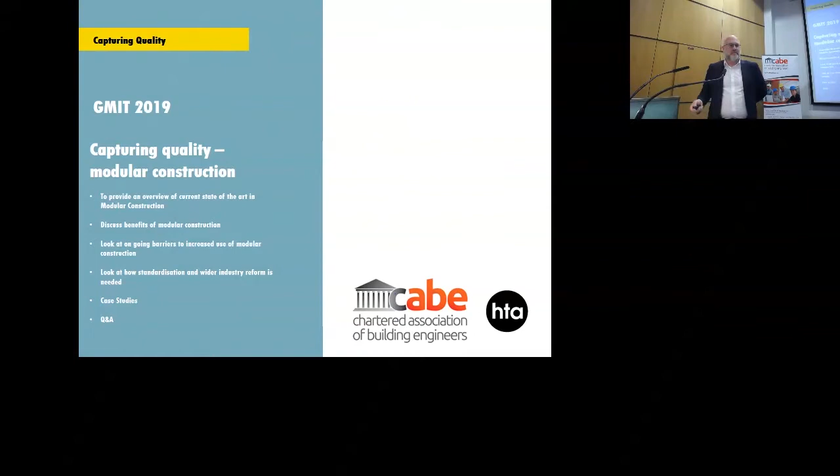As has been said, I spent 10 years in the UK government working in the Department for Communities and Local Government, now the Ministry of Housing, with lots of interrelationships with housing policy, but mainly building regulations. During that time, the reason I became interested in modular was that our government adopted a policy called the Accelerated Construction Programme - a programme to try and deliver around 10 or 15,000 additional homes at a very fast rate, which focused heavily on modular construction.

One of the lessons that we all need to learn, and policymakers need to learn, is that when you force construction sectors to adopt technology with which they're not familiar very quickly, or throw money into construction sectors to push for particular outcomes over short spaces of time, that massively increases risk, because you're forcing people to use technologies and processes they need to understand well to deliver well. So I got very interested in how we manage the risks around the growth and use of modular construction in a way that delivers a really good, safe product at the other end.

HTA Design LLP, who produced a lot of the content for this talk, are an architect's practice rapidly becoming recognised as a world leader in modular design. They've done some of the tallest buildings in Europe. This is Apex House, the tallest modular self-supporting building in Europe. And I'll show you a project later, which is the tallest self-supporting modular building in the world.

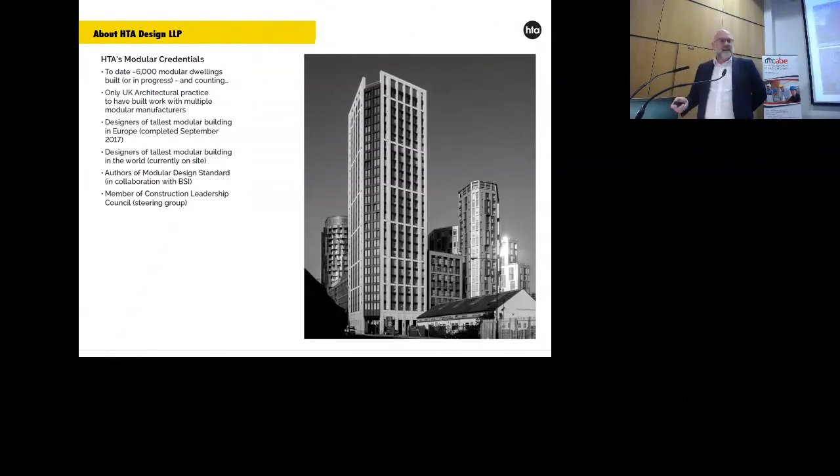They've done a lot of great thinking, but there are still questions that remain unanswered about how we actually utilize and really capture this new technology. Many people in the room will say, well, we've been here before. We've talked about modular time and time again. Every 15 years, there's a new initiative that says this is the way forward. So the question we've been trying to assess, working with BSI, the British Standards Institute, is developing a PAS standard that can help address this. The question we're asking is, what are the barriers that we need to break down to ensure that can actually happen?

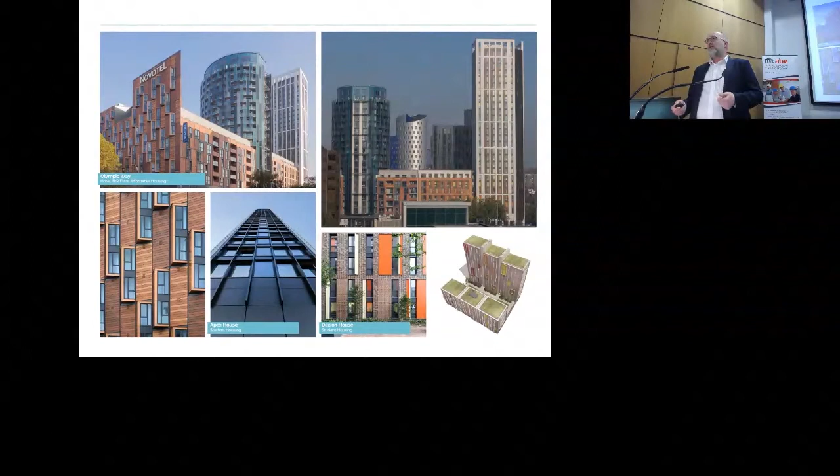So this is just a couple more slides of the Apex House project. It's not just about tall buildings. Modular in particular is well suited to any building projects where you've got a lot of repetition. The Apex House project is, I think, 560 student accommodation units. It's not just the tower block, it's the two-side, red terracotta clad lower rise units. So as long as you've got the repetition and scale on site, it's an absolutely brilliant way to deliver volume very quickly, primarily beneficial into sectors where you want fast turnover, so private rented or social rented sectors where you want to get things onto site and get the rental or occupation up very quickly.

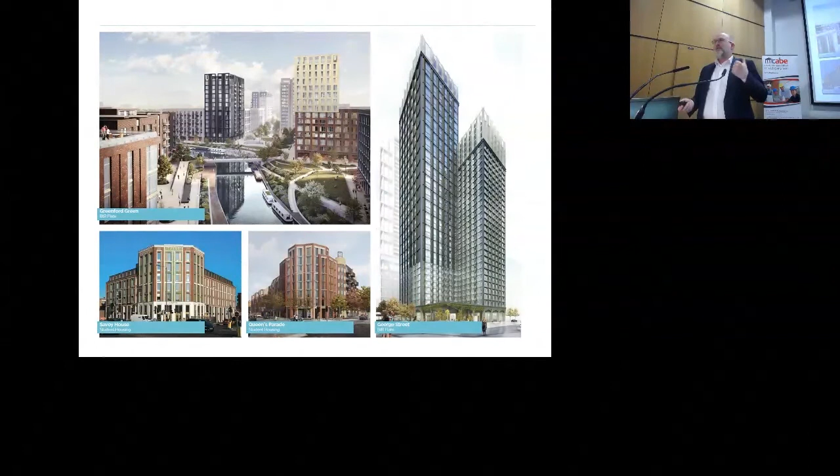And these are some other projects, very variable, doesn't have to be non-traditionally clad. The projects at the bottom of the page have got an external brick-faced facade in a style that was required because of the conservation area they're being built in. The project on the right is currently on site - it's the world's tallest residential modular building, 38 and 44 stories of self-supporting units around a slip-form concrete core. I've got a photo of that on site at the moment. If anyone wants to see it at the end, they are literally building these slip-form cores standing entirely independently at the moment. They're incredibly high, slender structures, and it's quite fascinating to watch them come together.

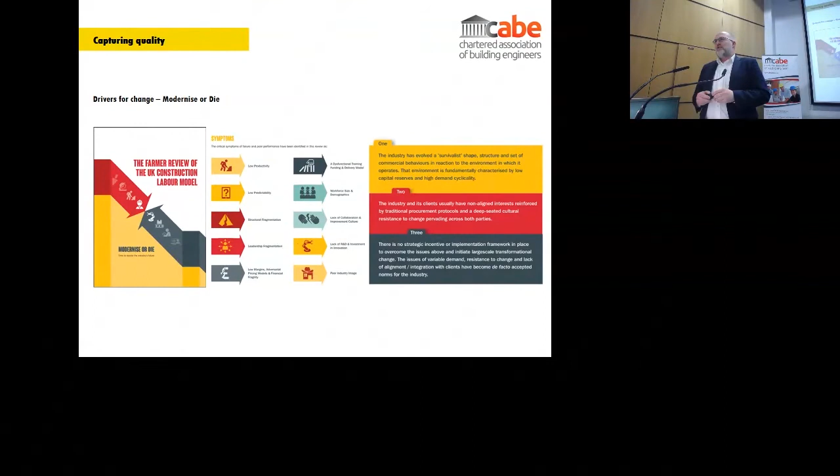So what's the context for these questions? I'm not going to go into these in too much detail, but you've heard it all before. The problems we have in our sector are really pretty well understood. We really do understand what's wrong - it's the solutions that are difficult. But the Modernise or Die report by Mark Farmer, which came out a year or so ago, set out a whole range of problems that are understood: low productivity, low predictability, structural fragmentation, leadership fragmentation, low margins, adversarial relationships and pricing models, dysfunctional training, workforce size and demographics, and lack of collaboration.

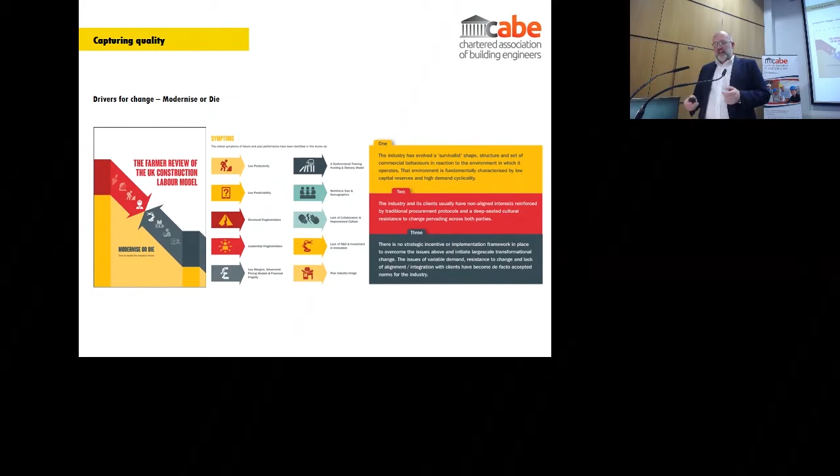And it came up with three key recommendations that are relevant. First is to basically drive towards changing commissioning from traditional to pre-manufactured approaches. Second is to invest heavily in innovation, so a real drive towards adopting those technologies. And the third was to shift housing policy to, again, drive the need for housing towards the adoption of pre-manufactured technologies in their use.

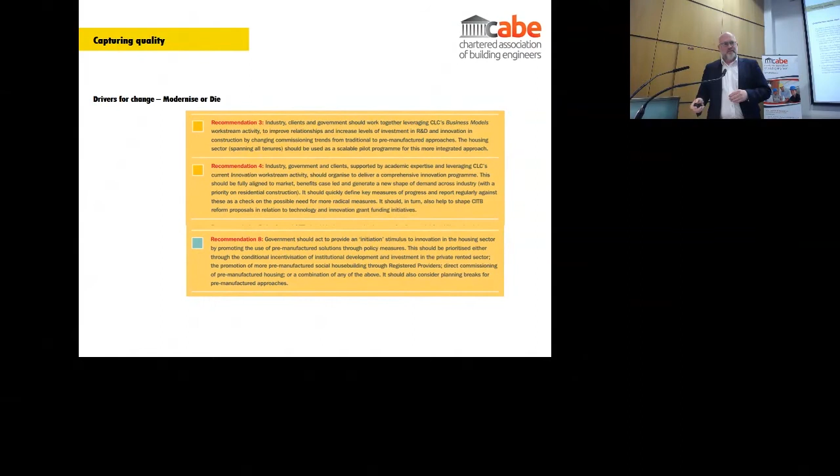The UK has also got an industrial strategy that came out last year, setting out really ambitious targets for construction in the UK. The aim is to achieve a 33% reduction in cost, 50% reduction in time for construction, 50% reduction in greenhouse gas emissions, and a 50% reduction in the trade gap around construction. I'm not sure how that's going to work out given everything else that's going on, but we'll have to see. It had three strategic aims that underpin the whole of that agenda: optimising the use of digital technology, increasing the use of off-site construction, and moving to an approach that appreciates and prioritises assessment methods using whole-life assessment procedures.

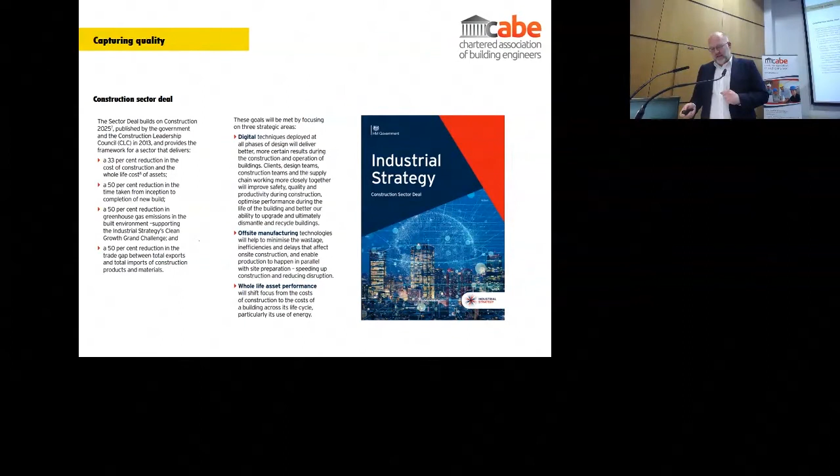Now, clearly the central one of those, moving to off-site construction, is very relevant to modular - clear sense that's part of the solution, part of the way those targets are going to be achieved. But off-site and modular is also very good in terms of helping optimise the benefits of digital frameworks and BIM in particular, but also very good at improving the predictability of asset performance and durability and things like energy performance. So we also have a major housing problem in the UK. We have a massive shortage of housing. The government's now targeting 300,000 homes a year to be built.

The capacity and supply issues that we have, you know, our traditional sector is pretty much maxed out. This table exemplifies the difference between supply and demand, between private and social housing. There's a big gap there to be filled, and it's primarily in the social housing sector.

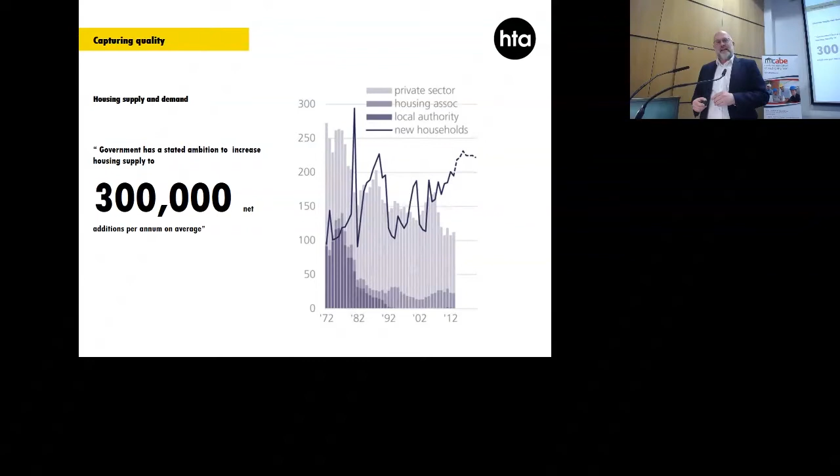The private sector is not going to respond enough to meet this overall housing need. And if you're looking at rental sector, private rental or social rental, modular is really relevant. And then we've talked about Hackitt. The Hackitt review will have implications that are going to continue to see change in our sector in the UK, probably major changes over the next decade, and changes that will be ongoing for the next 30 years, I imagine.

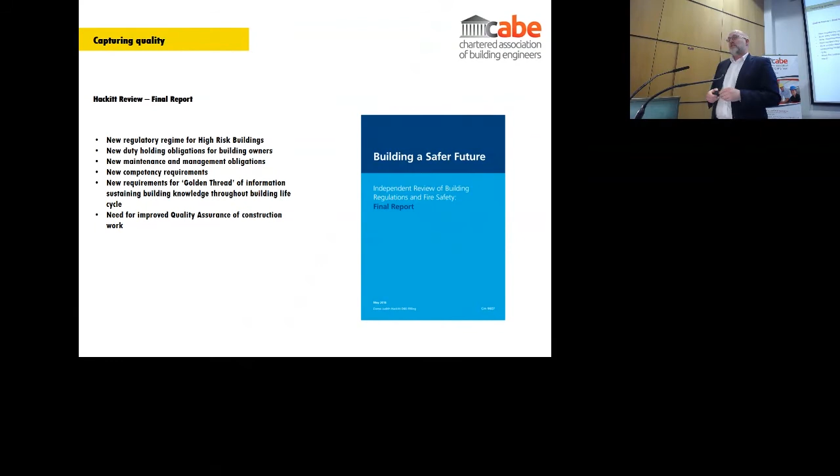It's absolutely fundamental that we sort out problems so that we don't see events like Grenfell Tower happening again. And quality is right at the bottom of that picture. We have, as Dame Judith has mentioned and others have pointed out, an industry predicated too much on bottom price and not on certainty of delivery of quality. And all of these considerations are relevant.

So I thought it'd be good, refreshing before lunch. Last session before lunch needs some pictures of buildings to keep people awake, I think. So I just thought I'd kind of show a few of these.

So this is the Apex House project I mentioned earlier. Completed 6 months from start to finish, probably somewhere around 45. I don't know the actual contract value, I think it's around 45, 50 million. Just under 600 student accommodation units.

The actual construction, as you can see, the slip cores formed at one end, and 6 months later the project's entirely complete. There were never more than 12 site operatives on site. That's the most there were in terms of builders on site at any one time during this project. The change in dynamic between traditional construction and modular in that respect is just absolutely astonishing.

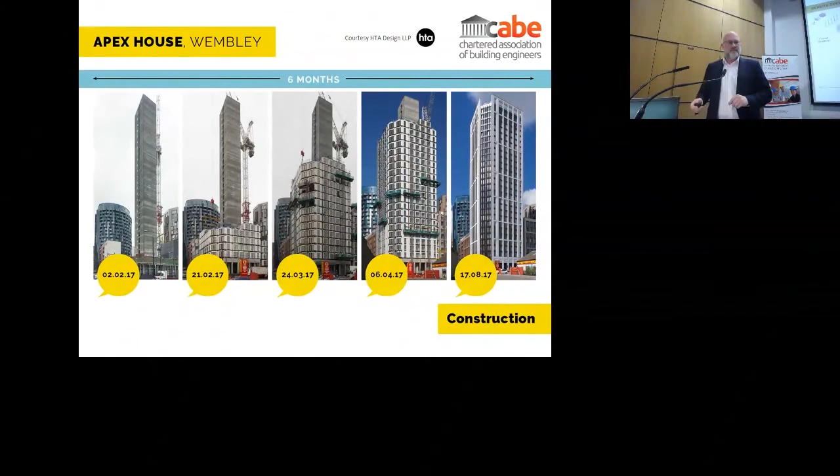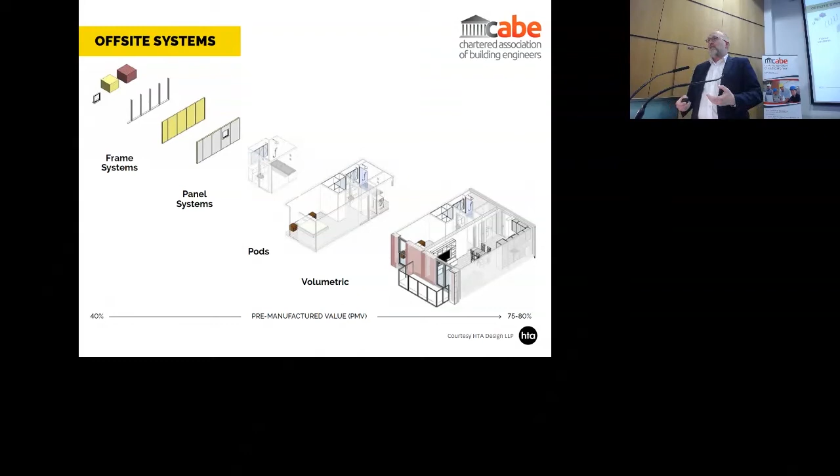There are, of course, other types of modular and off-site construction. Other flavours are available: components, frame systems, panel systems, pods and volumetric. The work that I've been doing is focused largely on volumetric and modular, because as you go across this scale from elemental off-site manufactured to fully modular, you start to capture more and more of the benefits from the off-site manufacturing process. And those benefits are really serious.

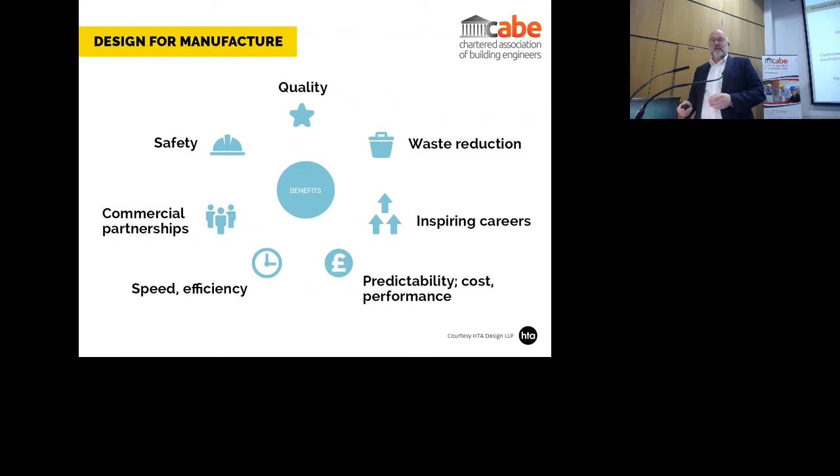There are great quality gains, there's waste reduction, there's a real shift in the opportunities you can offer people. At the manufacturing base, you've got a much more stable lifestyle that's geographically located in better working conditions, so it's good for staff retention and recruitment. You've got predictability in terms of cost and performance, speed and efficiency. Commercial partnerships are more sustainable because a lot of the adversarial elements are removed. It's an entirely different way of operating, and much better safety, with fewer operatives on site.

How big are those gains? Why are they so significant? Well, these are assessments from projects. They're not kind of national statistics, but they're pretty important. So reduction in speed of delivery up to 50%, so anywhere between 20 and 60% assessed from real projects.

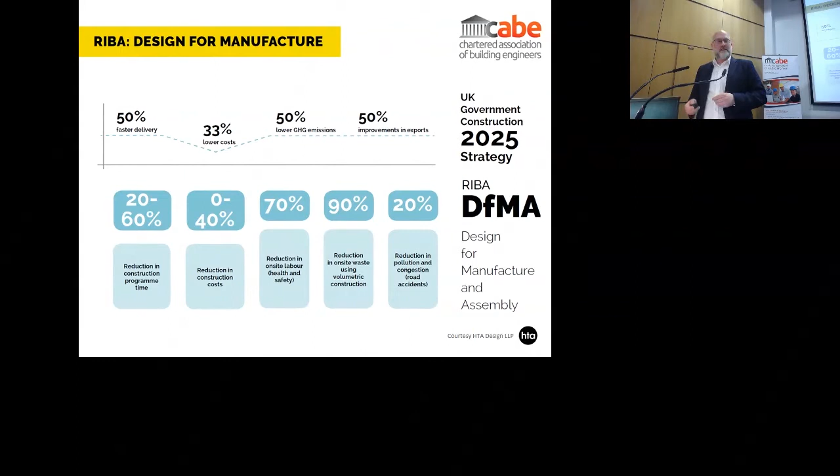33% lower costs on average, 50% lower greenhouse gas emissions, 50% improvements in exports, and up to 90% reduction in waste. These processes are incredibly efficient because materials are cut exactly to size and exactly to specification, and you can really drive waste reduction. So overall, you've got quicker construction, earlier rent returns, less disruption. You've got more sustainable buildings, greater confidence that design is deliverable.

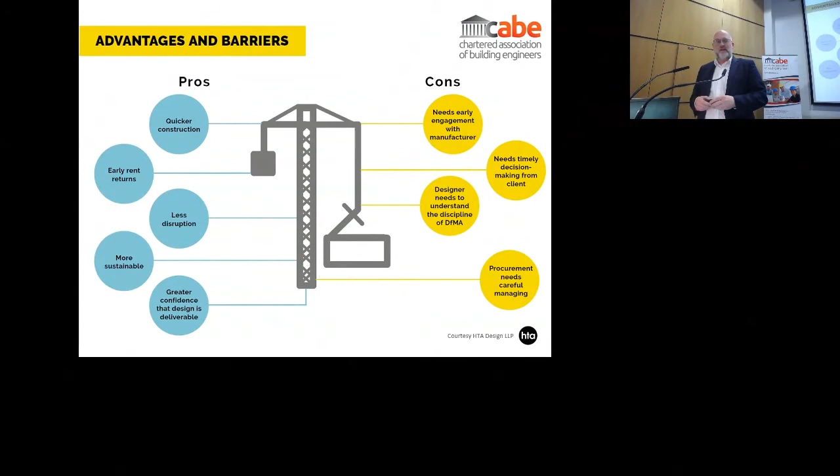But there are things you need to do differently. You need to engage earlier with manufacturers. You need timely decision-making from client that's in a different structure to others. Designers need to understand the discipline of designing for manufacture, designing these buildings. It's a different process, and procurement's different, so you need to think differently about that.

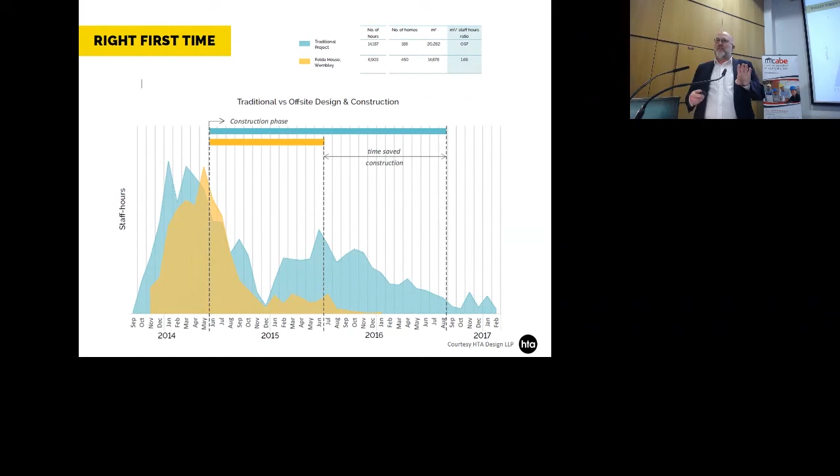All of those issues, that's the difference that's there. And the architects I speak to who work on these projects, they love doing the modular, not because it makes them more money, but because their quality of life as architects working on those projects is so much better. It's such a different experience compared to traditional, because they have a high degree of certainty that what they've designed is going to be built. The entire focus of the project team is on delivering what's been designed, and the fragmented and poor business models that are problematic for many traditional projects just aren't there.

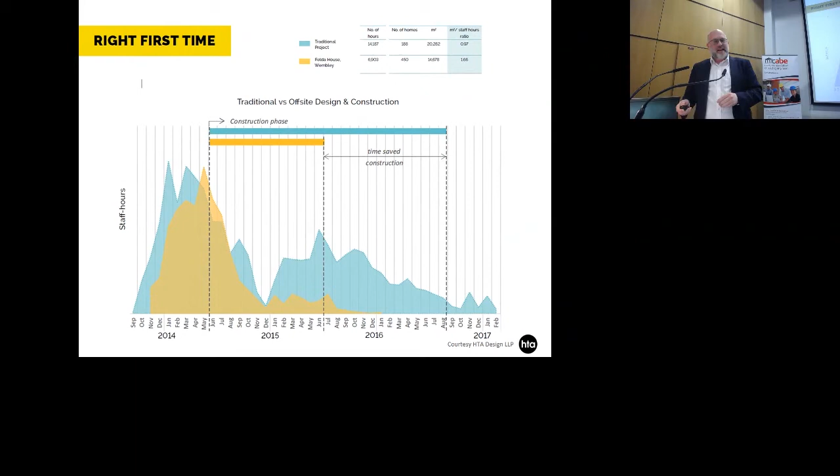So they're all won over. They're totally won over. It's a totally different life experience for them, and I think we shouldn't ignore those wins for people's quality of life.

There's also a really big economic incentive if you can turn over your development more quickly, because there's a big speed gain in this—remember, anywhere between 3 to 6 months on substantive projects. You can actually do more projects within any given time frame, which means you're going to maximise and deliver much better financial performance to your investors.

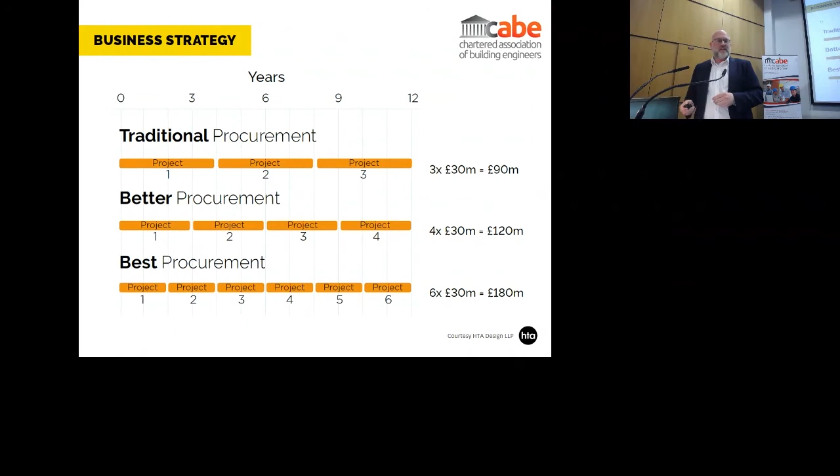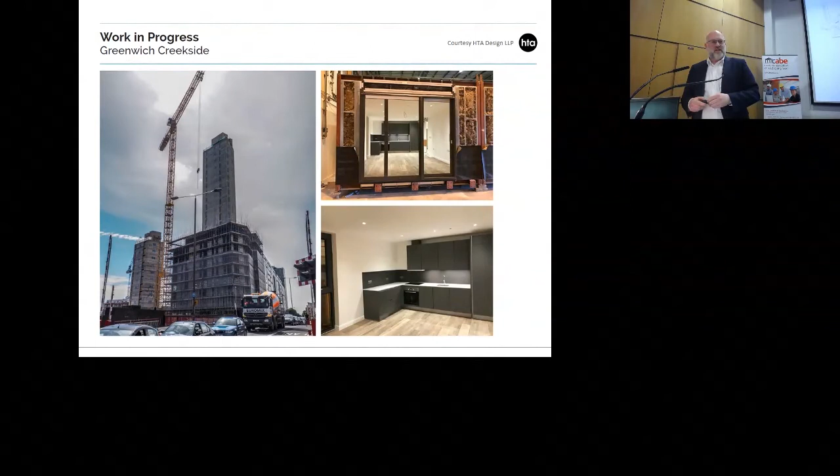So you can see a transfer slab and core on the left, and then the way that these units are stacked and assembled around the core. Again, just another diagram exemplifying how these buildings fit together.

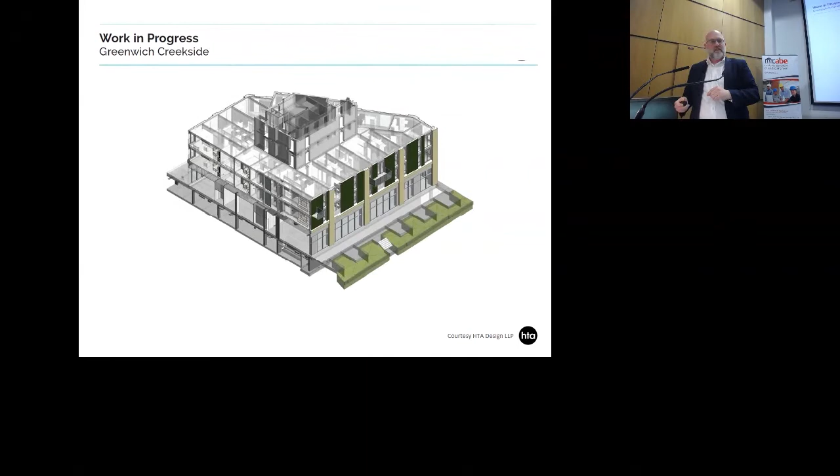And this is part of the benefit as well, of course. You've got a fully designed set of service installations, and a fully designed set of structural elements. These steel frames that are used are Metsec steel frames. They are cut in a way that you can only slot them together in one way—they're like super efficient IKEA units.

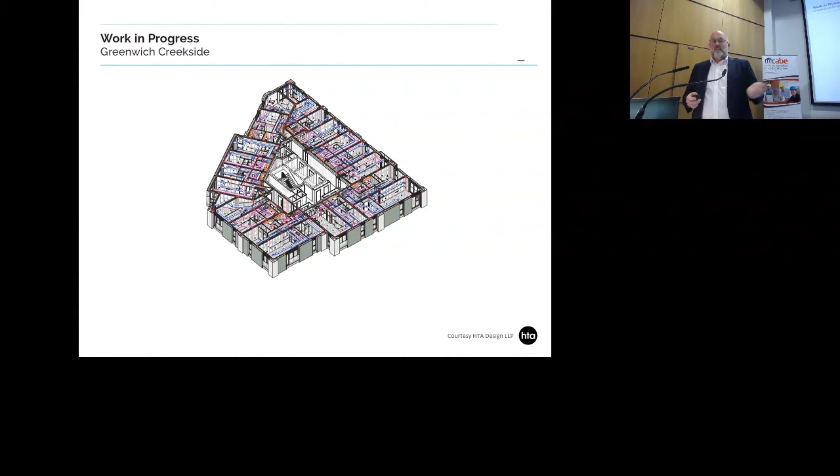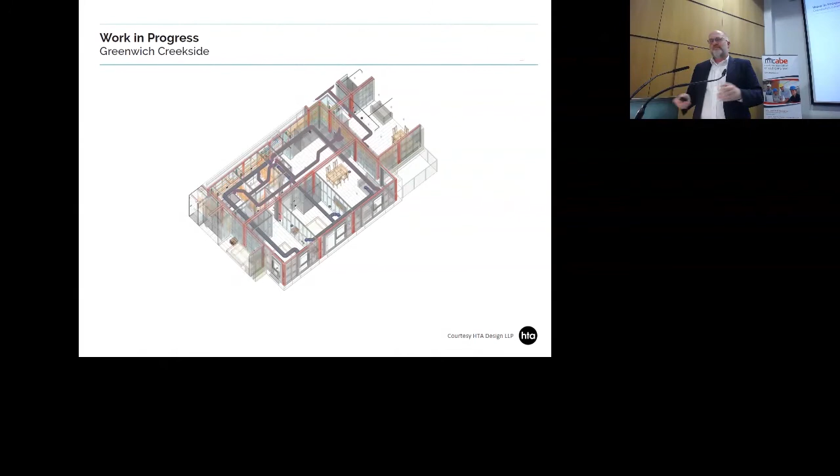So there's no way that anyone can put a stud or a noggin or a piece of the structure in the wrong place. That means absolutely everything is where it's designed to be, which means that for asset owners, people taking over the buildings, if they want to know where a pipe's running, or where the ventilation ductwork is, or where a stud is, it is precisely where it is recorded as being. There are none of the really avoidable collisions between services or other elements. You get precisely what you design.

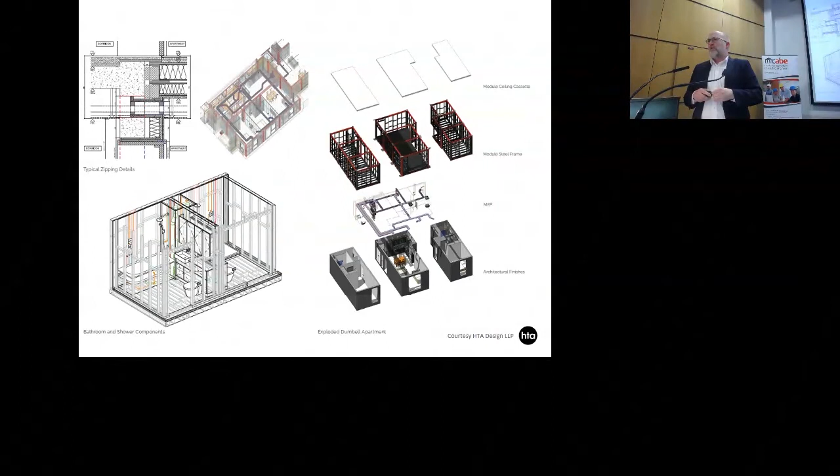And again, just further detail on the way that these modular units and packages come together. When they're put together, there's a process called zipping up, which is about putting the interface elements in between the units. So you put in cover plates, but you can actually pre-commission all the services so that you know they perform, and then just plug them together when they arrive on site.

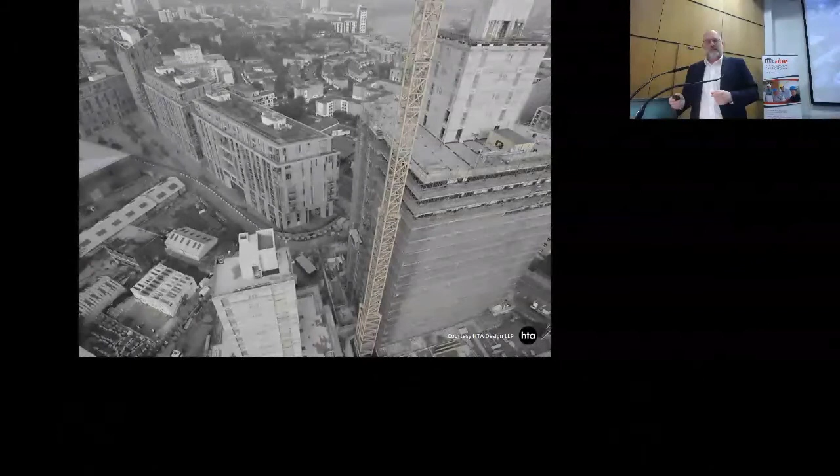So one of the big questions we're looking at is how do you actually standardize this? We've been doing a lot of analytical work trying to map out all of the thinking that's been done over the years on these issues. And going back to benefits, there are lots of specific benefits that have been identified.

There are some really big macroeconomic benefits. It was very interesting hearing earlier the discussion about how to balance the economy in Ireland—we have a similar issue in the UK. One of the advantages of off-site manufacture is that you can manufacture in areas with lower economic activity where you've got more available workforce, and shift them into the areas where there's higher housing demand. You can start to balance all sorts of aspects of your economy. But these benefits really are pretty well evidenced now, and are pretty material and substantive.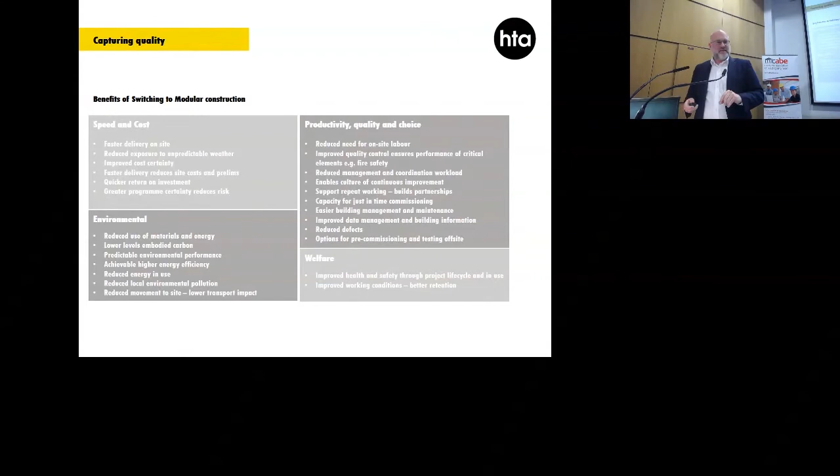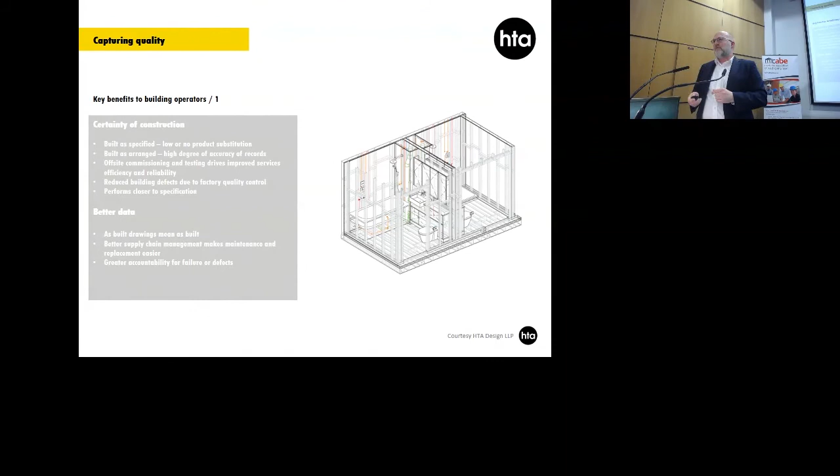As I was saying, you get a lot of certainty of construction. You really do know what you're getting, and that is not just good for the actual construction team, but for operators and maintainers, it's great. And you've got better data. The difficulty getting as-built drawings on projects is universal, but not with these projects. They really do deliver.

You also get the benefits of a manufacturing mindset and culture. It's a completely different approach. It's about delivering exactly what the client wants and then improving it the next time it's delivered. It gives you an opportunity to make real benefits from post-occupancy evaluation, because the design or project team you work with is the team you work with again more often, and they have a standardized product against which they can drive performance. That opens up the manufacturing of these buildings to thinking from other sectors. For example, advanced product quality planning is a quality improvement process developed by the three big American car manufacturers. You can't do that with most of the way we procure traditionally.

So the question is, if it's so great, why isn't everyone doing this already? In the UK, the sector is about 6,000 units a year, so it's still relatively small. The answer is that there are a lot of structural constraints, reasons why we've been here before and things haven't quite taken off. Economic cycles are more difficult to manage because these businesses, manufacturing has fixed overheads. It doesn't have the cost and risk divestment models that traditional contracting does.

There's confidence in the ability to capture benefits for clients. They ask, really, am I going to get the benefits at the other end of this? Part of that problem is confidence in knowing how to procure the off-site systems so that the actual cost and performance benefits are realised.

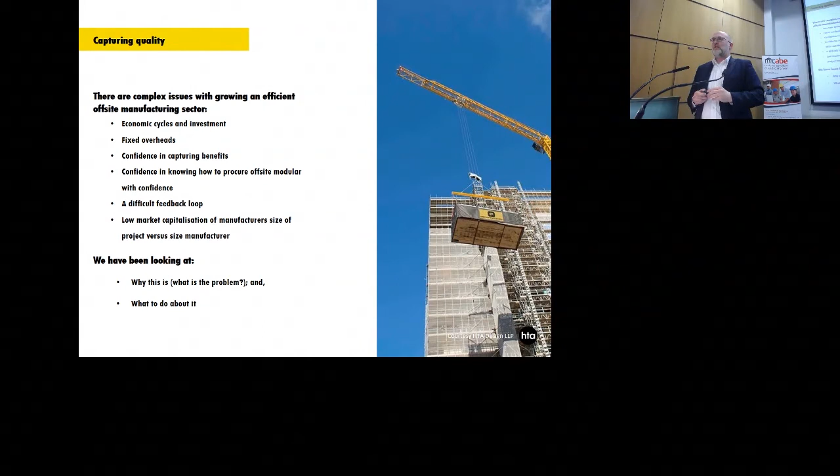We've mapped out a whole range of what we call client-side barriers. These are either behaviours or issues for clients. I'm not going to go into them in infinite detail.

Scale and critical mass, so clients actually commissioning enough work in this sector to encourage growth. Client knowledge and confidence, a whole range of issues around understanding how to procure, structure, finance, insurance, and how to argue within organisations that this is a sensible thing to do.

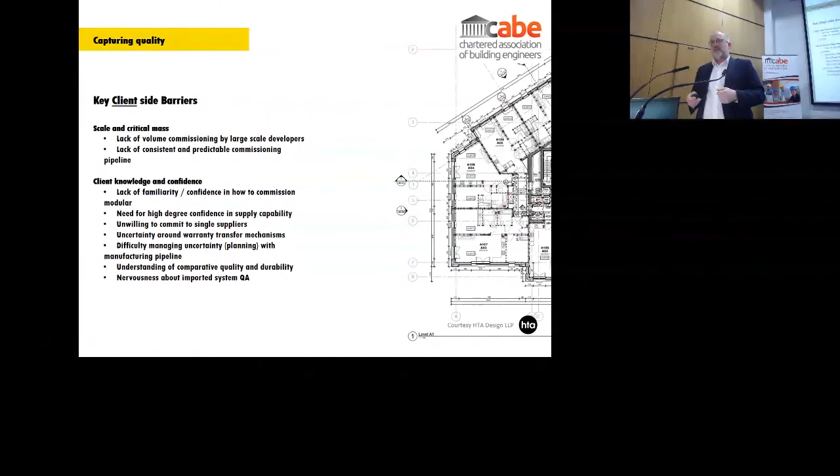Finance and cost. You need a different approach to the way you finance these projects because you are paying a lot more upfront for the manufacture of units off-site before the materials arrive into the site boundaries. You need a different approach to how you insure risk.

It's all doable, but it's unfamiliar. Some parts of the mortgage market are nervous because the performance and reliability of these systems isn't as well understood as traditional. It's worth noting that it's not that traditional is better or more reliable, it's just that they know what goes wrong with traditional in more detail.

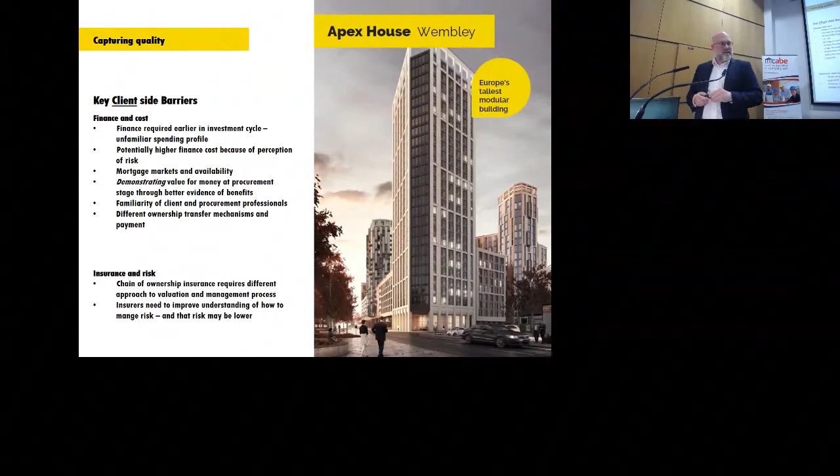And then, as I said, there are kind of insurance and risk issues. For the industry, for manufacturing to be effective, you need your facilities to be running at capacity. You need throughput that's very steady. So those problems on the client side with confidence in commissioning mean that manufacturers often have gaps in that supply capacity, which reduces their profitability and certainty of profitability, which impacts on investment.

There are structural issues in terms of leadership. The challenge of moving away from diversified supply chains is a problem for many clients and developers. And there's still development needed on contractual mechanisms.

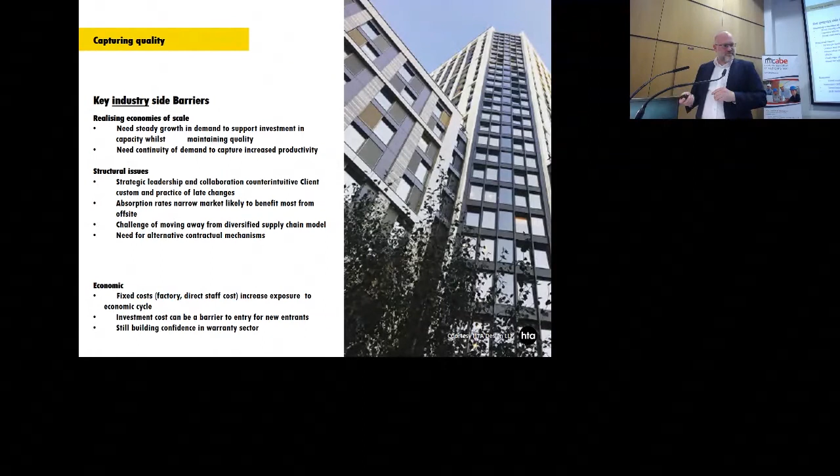Fixed factory costs I've mentioned already, and the investment cost needed, the upfront investment cost, is seen as a barrier. Some of the permissions that are required are difficult. Planning permissions that require you bring employment to an area are difficult.

If you've only got 12 operatives on site at one time, it's hard to deliver really big apprenticeship or training schemes, which is a requirement a lot of the time. Traditional material exteriors can mitigate the speed benefits, and you need a different approach to building control sign-off.

These units that I've been looking at and showing you here today are manufactured outside the UK. Who does the inspection? How do you quality assure and make compliance checks on those? And there's a lack of standardised approach to commissioning. So standardisation is a really big issue here, as are the need to integrate main contractors in site work.

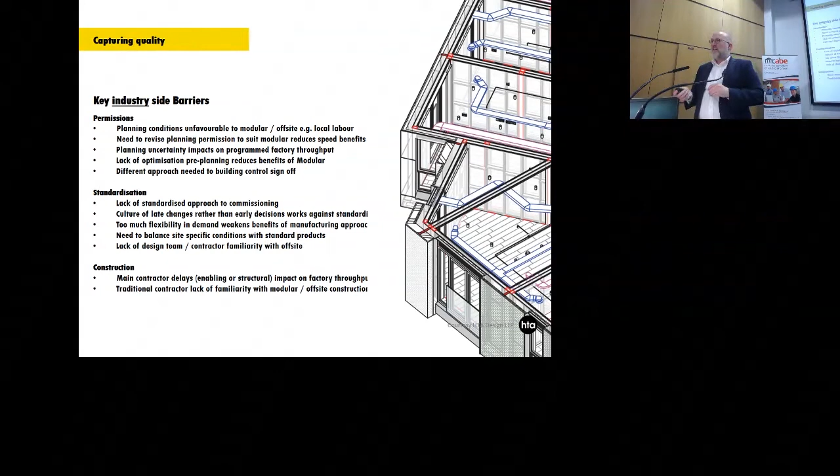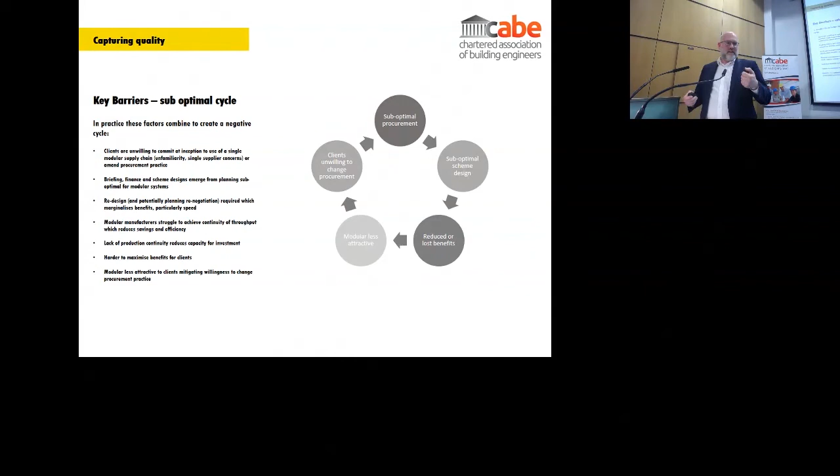So overall, what you get is a kind of suboptimal cycle where you've got suboptimal procurement, suboptimal scheme design, you reduce or lose the benefits of off-site. That mitigates the incentives for clients and makes it harder to drive increased supply.

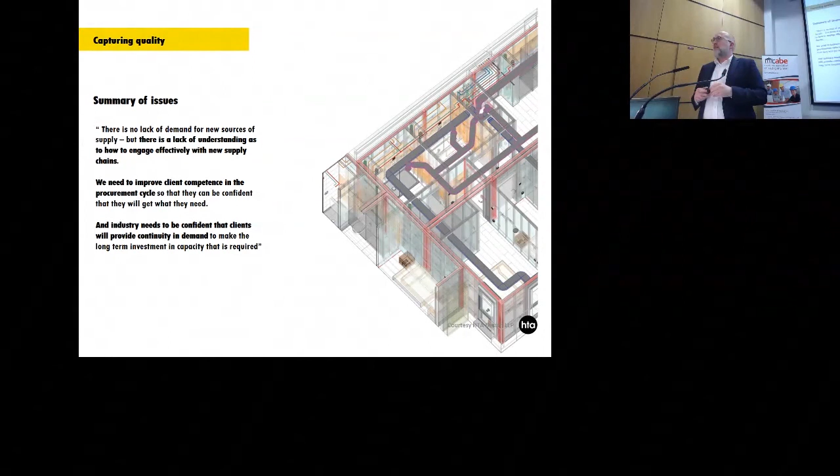So our view is there's no lack of demand for new sources of supply. We have a big housing supply problem. We don't have the capacity in our traditional marketplace. We've got a skills shortage coming towards us that's really, really big. There's a lack of capacity and understanding to actually capture these. It's all about confidence and knowledge.

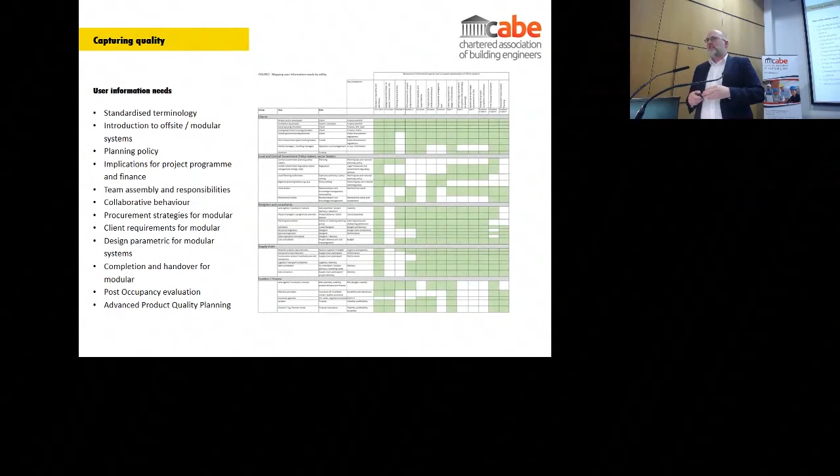So we've been working through looking at information issue, what the information is that's needed by people within the sector. And we really think the standardisation can help, and it can help in a lot of ways. We can set standardised methods and approaches to procurement that offset risks. So all of the insurance risks, the way that you need to restructure your financial processes, the way that you need to look at quality assuring, we can look at a standardised process that industry can buy into as managing that risk for them and then improve it over time.

We need to have, most critically, a way to ensure that scheme designs are not tied into single suppliers. So the fundamental barrier to clients adopting modular, more than any other reason, is that they're nervous that when they commission their design team right at the beginning of the process to use a modular system, they have to design to the specifications of the different systems that are available. There's not a big variety of those, but they're all different. And that locks them into a supply chain with one supplier.

They're nervous about that because if your planning permission delays your ability to get on site, you lose your production slot potentially. You may well not be able to utilise that supplier because they'll be booked out on something else. You lose all the speed benefits. You've got a site that's permissioned, but you can't progress.

The approach we think will work is to create sufficient standardisation across all of the modular and volumetric housing types so that the industry can converge on those models. So standardising basically allows clients to have confidence they've got a diverse range of suppliers at the other end. They can then maximise whether they want competition or whether they want certainty, and that will, we think, drive things better.

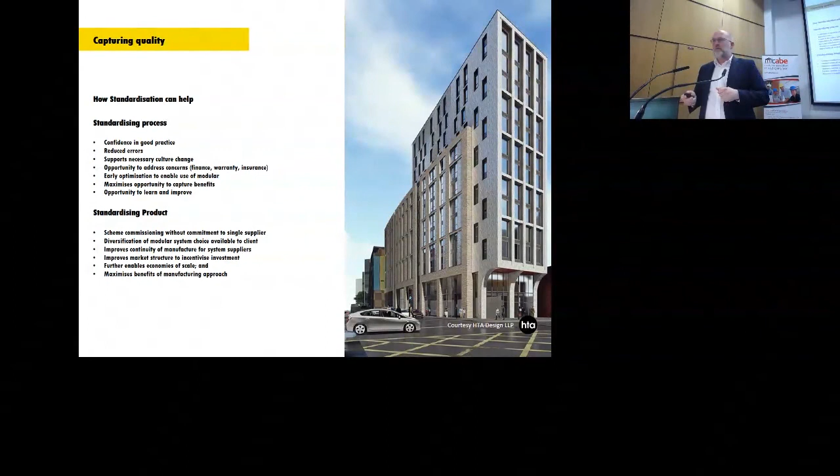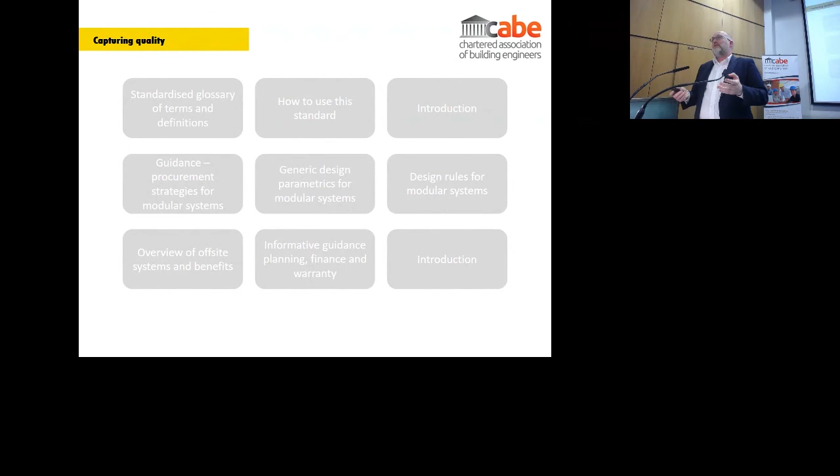The information products that are needed for that are fairly obvious, but you know, standardised glossary and terminology - the industry is still sufficiently young that there's an opportunity to drive a lot of benefits through that. But these generic design parameters and design rules for modular are absolutely key to capturing these benefits.

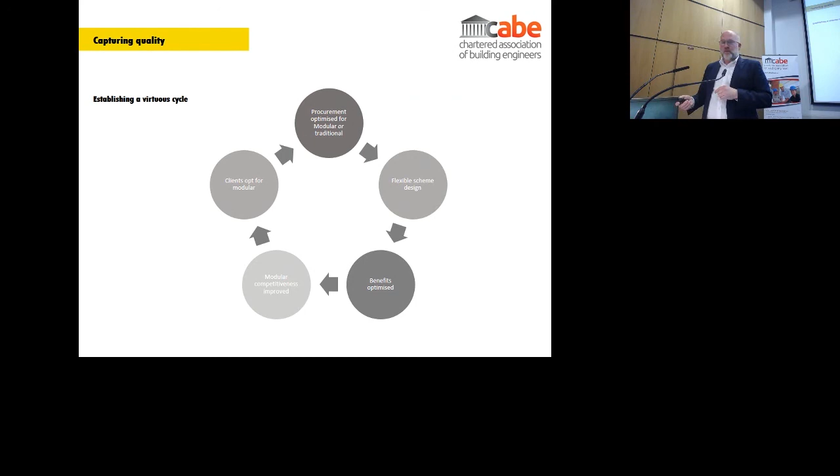And what you get from that is a procurement cycle which is optimised for modular. There's always the opportunity to switch back, has flexible scheme design, optimises and captures the benefits, and enables people to actually procure with confidence. So there's some way to go, but actually I think we really do understand what the problems are.

The big question that I have come away from looking at this sector for 2 years is why can't the traditional sector learn a lot from what's going on here? Because many of the things that are said to be unique about off-site manufacturing aren't unique. It's a business model, it's a mindset, it's an approach to focusing on delivering what the client wants rather than satisfying pretty much flawed business models that require disruption in order to rebuild margins where we've had a bottom pricing culture.

So I think, in summary, there's a great deal to be benefited from by making this work. I don't think we're far away from actually standardising the knowledge that we need to enable people to do that with confidence. But there's also a lot that we can then feed back into our other parts of the industry, which we also need.

It's not one or the other. We need everything firing at on all cylinders to deliver the housing and the buildings that we need. So thank you very much.